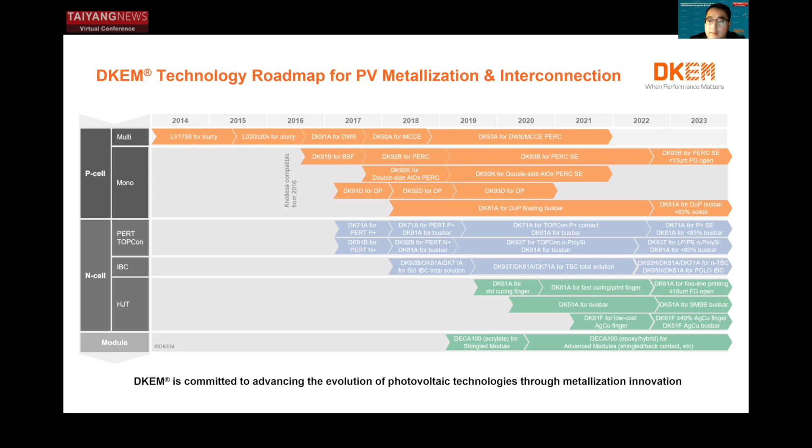Actually, here we divided it into three parts. The green part is for front side power loss, and the blue one is back side power loss. For DKEM, since we are a paste supplier, we are trying to link what we can do to the power loss. So we can also work from three sectors. First, the front side is the key. I think it is the efficiency accelerator, a key enabler for higher efficiency of TOPCon solar cells.

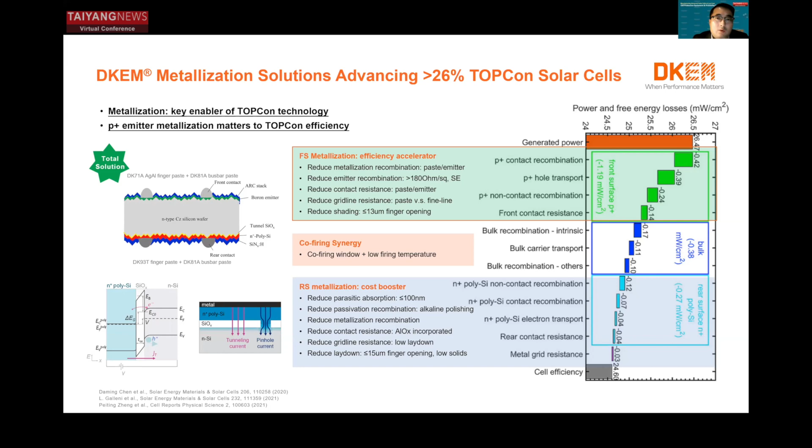So generally, I think metallization is actually the key enabler for TOPCon technology. And from this analysis, we can see that p-type emitter metallization is very critical for TOPCon efficiency improvement. As for DKEM, as I just highlighted, we have the total solution. On the front side, we have DK71A aluminum silver paste for finger, and DK81A for bus bar. For the backside, we have DK93T for finger and DK81A for bus bar. This is a general introduction of what we can do.

Next, we just want to highlight how to make contact to TOPCon solar cells. First, we need to work with the backside n-plus polysilicon, and we also need to make good contact with the p-type emitter. So for n-type polysilicon, or the n-plus emitter for PERC solar cells, we need to form as many direct conduction channels as possible. That means more silver crystals around the pyramid tips. This kind of direct conduction is very effective.

Others we may know, there are also indirect conduction channels. But if we look at the efficiency of conduction, direct conduction dominates over indirect ones. So then we look at what happened at the p-type emitter. For the p-type emitter, it's a boron-doped surface, compared to the n+ emitter.

For the boron-doped p-type emitter, at the surface there is a lack of electrons. It's difficult for silver ions dissolved in the molten glass during firing to reduce to form the silver crystallites, which work as the direct conduction. So what we need to do is to help promote the formation of direct conduction on p-type emitters.

By adding these aluminum powders, it's easy to form the low melting point silver-aluminum phase. And finally, big silver-aluminum spikes form in the emitter or even penetrate into the silicon base, which take the role of direct conduction channels to help achieve good contact. But unfortunately, this kind of design will cause severe metallization-induced recombination. We need to take care of our formulation design to get a balance between contact improvement and recombination. This page shows how paste suppliers can control or optimize the contact and recombination on the conventional p-type emitter.

Generally, we can modify our recipe to control the number and size of silver-aluminum spikes by modifying our glass phase design and our aluminum selection. So basically, we can optimize our glass etching property to create more local holes for material exchange channels, and then we can optimize our inorganic formulation to control the thermodynamics of spike growth to form smaller spikes. That means we would like to see smaller but more numerous silver-aluminum spikes to get a balance between contact and recombination.

Besides the silver paste itself, we can also utilize process optimization to improve the performance. First, we can design a deeper junction or use a selective emitter to weaken the impact of silver-aluminum spikes. And also we can optimize our firing profile to get lower thermal flux during firing to control the thermodynamics, to achieve smaller but more numerous spikes.

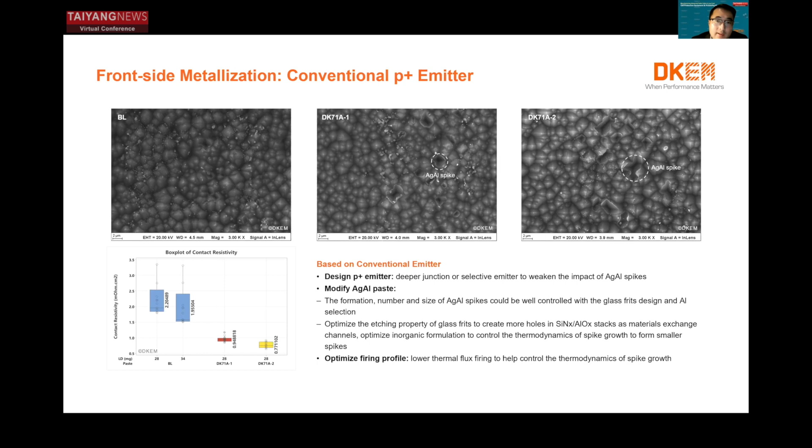As I just said, for the metallization area it's a much deeper junction, so it's easier to achieve lower J0 metal. It's good for metallization recombination. And also, if you look at the middle pictures, for the deeper junction it's also easy to get a lower contact resistance. So it's pretty good for metallization design. With this kind of SE emitter, it's easier for customers to achieve more than 0.3% efficiency benefit combined with metallization paste modifications. And this deep junction at the metallization area is also good to achieve robust reliability.

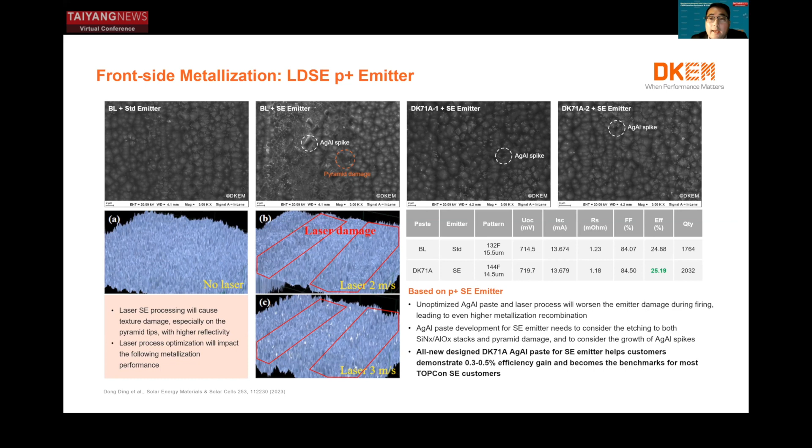So with this new paste design, we work with customers combined with pattern optimization. It's easy to achieve more than 0.3% efficiency gain, and we are confident to demonstrate 0.3 to 0.5% efficiency gain with whole process optimization. I think this is achievable this year. And right now, DK71A has already become the benchmark for most TOPCon SE customers.

And also for backside, we have LPCVD type machine, which prefers alkaline polishing surface on the backside. Some is the PECVD type machine, which prefers the small texture design on the backside. So this makes the backside contact quite complicated. We need a very wide window paste, either the contact window or the firing window and the EL window.

It's good that the DK93T silver paste with the innovative glass chemistry delivered a pretty good contact performance, and we worked with about 4 kinds of conditions. It demonstrated very strong performance and window. Right now it is actually the benchmarking product in the industry.

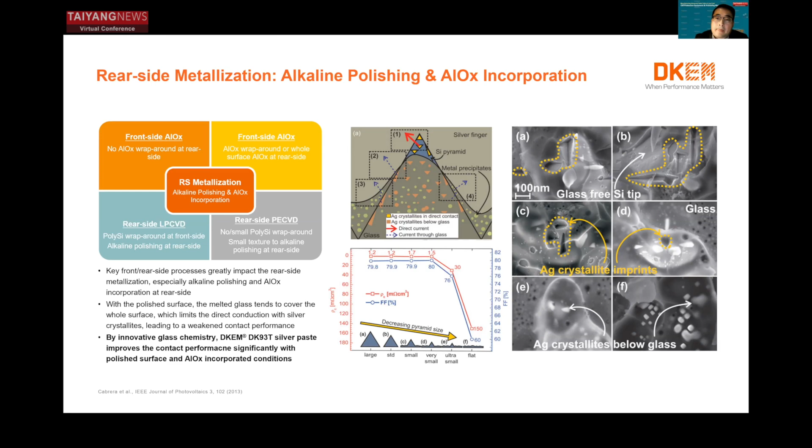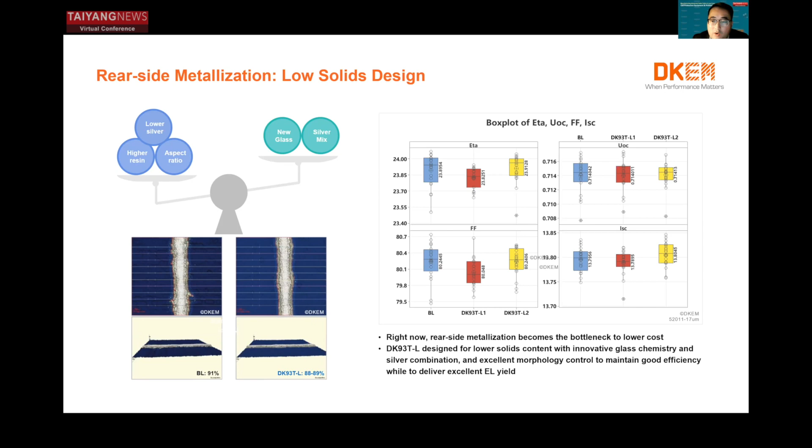We did some studies that with thin polysilicon layer, the sheet resistance increased significantly, and also we learned that there is some barrier effect of the tunnel oxide layer to phosphorus, which makes it difficult to contact ultra thin polysilicon layer. So at DKEM, we also implemented R&D to optimize our paste. So far we can deliver both low recombination and low contact backside silver paste.

At DKEM, I think we are quite open to work with customers to customize their paste for their special backside conditions. To us, I think it is critical for the industry to go to less than 100 nanometer polysilicon.

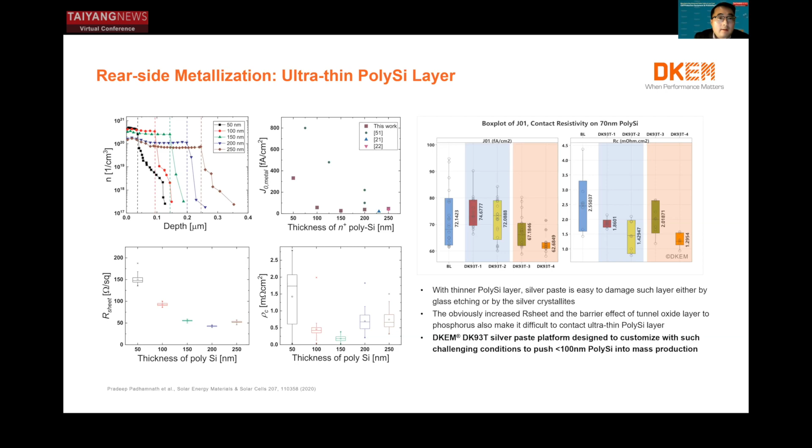From the paste part, we will design low solids concept, and customers would like to achieve even thinner polysilicon layer. So overall, I think DKEM is right now in the very leading position for TOPCon solar cell metallization. We are committed to deliver our total solutions to help customers and the industry achieve more than 26% efficiency for TOPCon solar cells this year or early next year. Okay, that's all on my part.

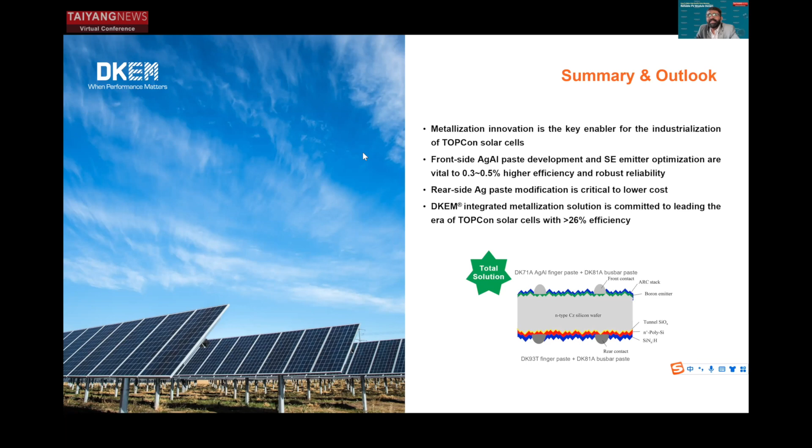Thank you, Kevin. Thanks a lot. It looks like really deep, in-depth knowledge on metallization. So I have one quick question. I want to catch up with the timing, but can you tell us what's the laydown on TOPCon right now, the average in the industry, and what's the reference for PERC?

Okay, if you look at consumption per watt for PERC, if we include the front side silver paste and backside tabbing, it's around 10 milligram per watt. For TOPCon right now it is between 12 to 13 milligram per watt. If you look at the laydown for single solar cells, for TOPCon M10 size wafers, right now it is between 95 to 100 milligram for leading customers, while for PERC, I think less than 80 milligram.